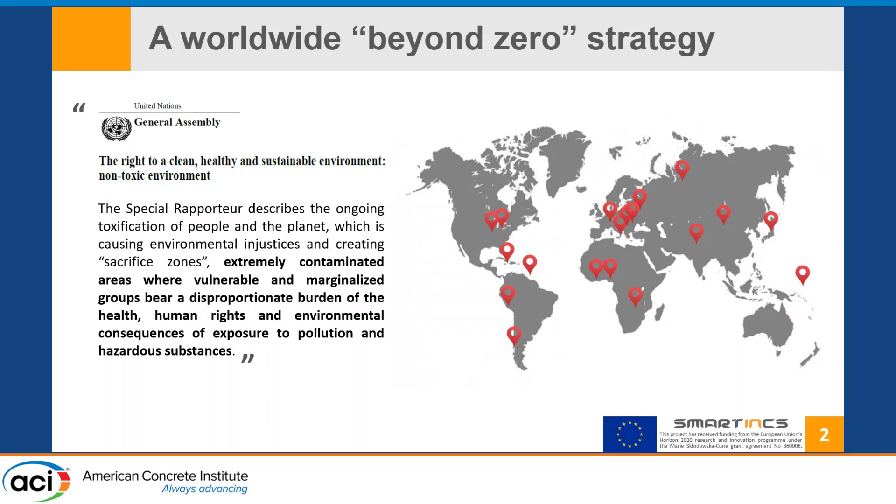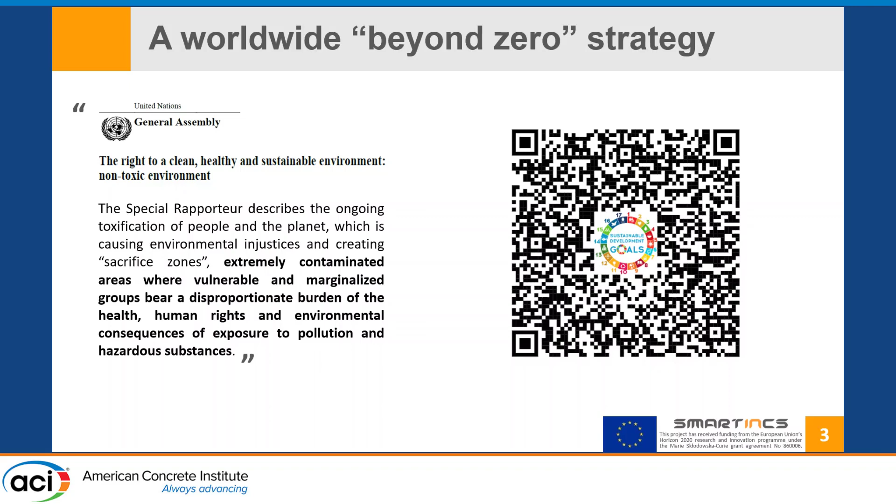What I want to highlight is that this problem has a worldwide dimension. Whenever we talk about sustainability in the construction sector, we are also directly talking about the social responsibility of all of us as part of that sector. So the next step could be to ask ourselves: what can we do during our daily work to improve the sustainability of such a sector?

We can quantify that sustainability in terms of environmental and cost sustainability thanks to methodologies like life cycle assessment analysis and life cycle cost analysis.

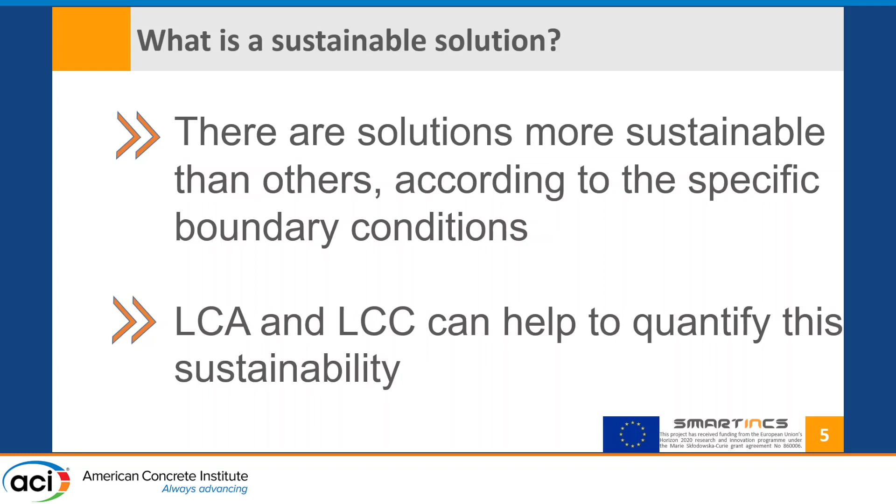We replaced alternatively 50% and 100% of recycled aggregates. Then the specimens, sized 160 millimeters by 40 millimeters by 40 millimeters of height, were then cracked.

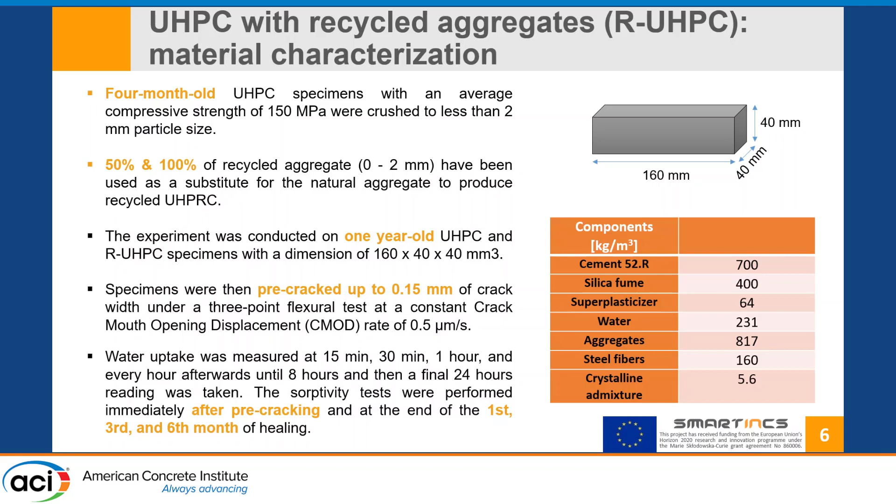We then repeated the sorptivity test to understand what happened over a certain number of months. It's important to highlight the healing environment, because we also added a crystalline admixture to the mix design, not only to reduce the water permeability of the concrete, but also to favor the self-healing characteristics of the matrix.

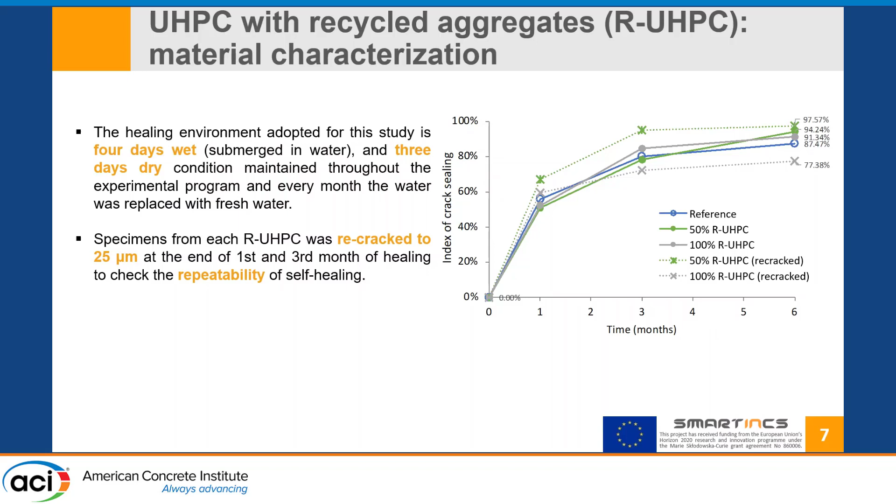The healing environment of this study was 4 days wet, 3 days dry, and we also tried replacing the water almost every month. We also recracked some specimens to check the repeatability of the self-healing properties over time.

What's important to highlight is what we observed in comparison to the reference solution, the UHPC without any recycled aggregates: a reduction in water uptake of up to 50.9%, shown in blue, for the UHPC up to 3 months.

For the UHPC containing recycled aggregates, it was possible to observe a reduction in water uptake up to 6 months. So in this sense, we are not only acting in terms of sustainability by replacing virgin aggregates with recycled aggregates, but by enhancing the self-healing properties of the material, we are also acting in favor of its durability, and thus directly on the sustainability of a specific structure.

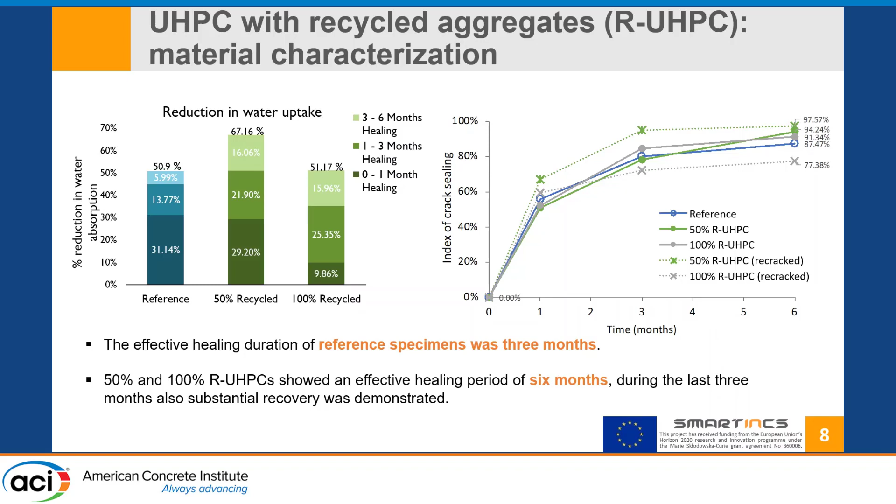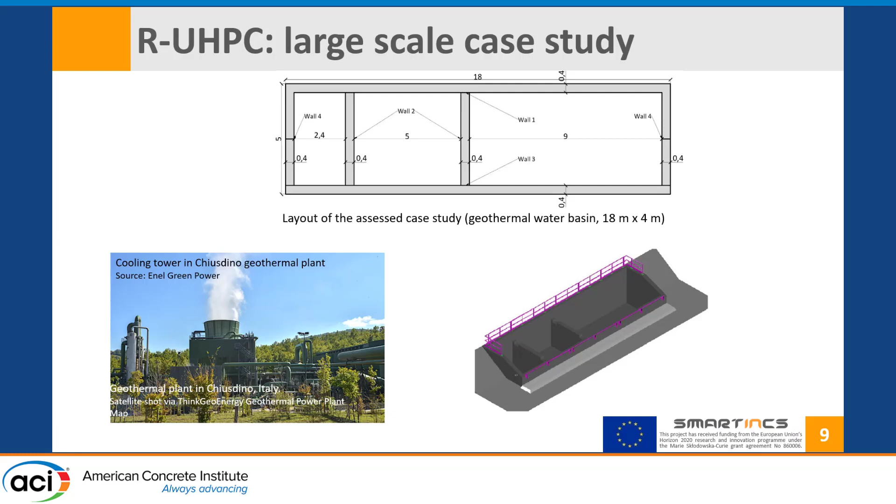What we did was to compare a structure made with ordinary Portland cement concrete to one made with UHPC. As you can see, it was possible to pass from a cross-section of 40 centimeters for the OPC wall to a cross-section as thin as 10 centimeters. Actually, the structural scheme we adopted for the UHPC was made of several slabs supported by columns made of OPC. So I want to highlight that we passed from 40 centimeters to 10 centimeters. But how was this possible?

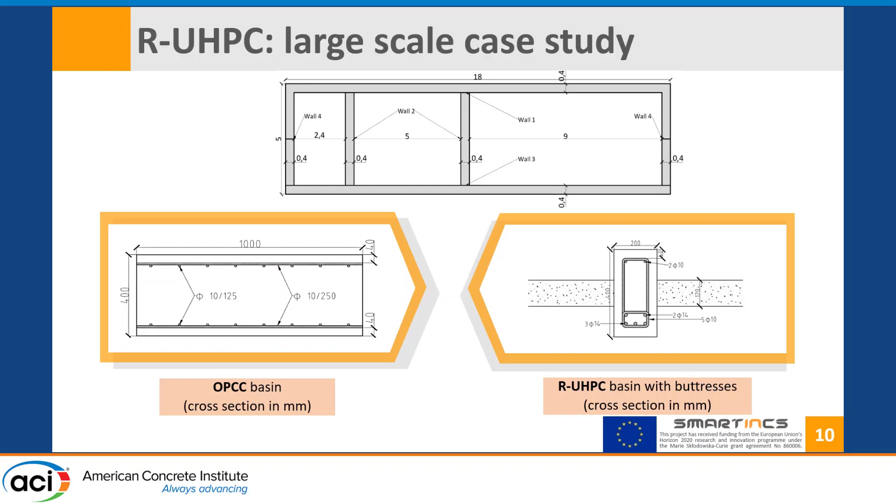This is really interesting, and it's what we want to stress with our daily work, because it's important to talk about durability assessment design. Nowadays, if we only follow the standards, we find some prescriptions, like the minimum water-to-cement ratio and the minimum cement content.

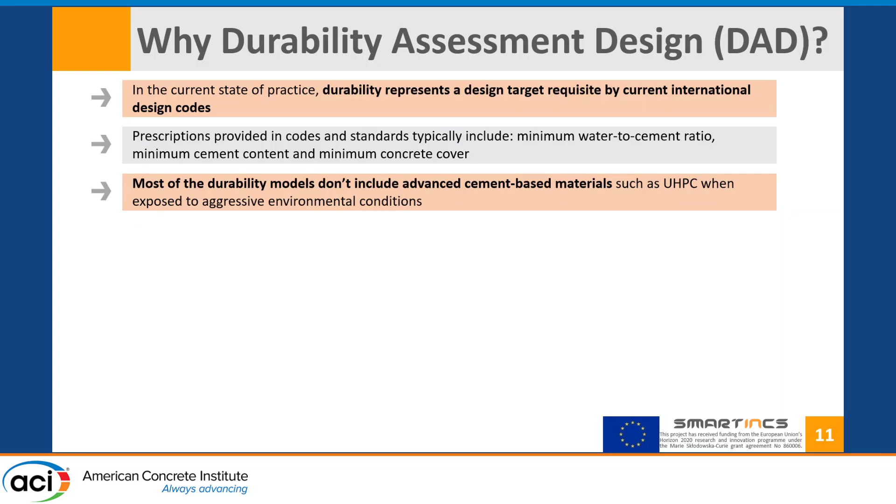If we consider the UHPC, according to the minimum cement content, we had 600 kilograms per cubic meter of cement, so we are already in line with the standards. But maybe we can do something more, because most standards don't really include durability models for such advanced cementitious materials, especially when exposed to a specific aggressive environment like geothermal water, where the main aggressive agent is chloride concentration.

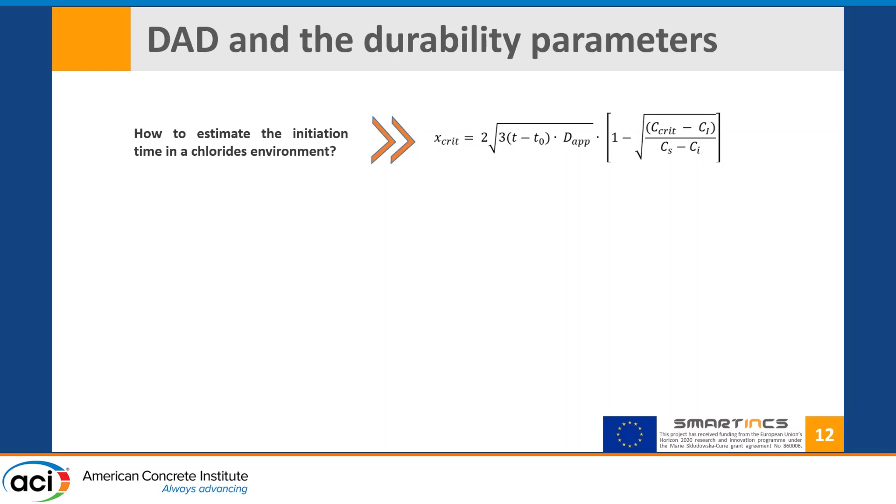To explain the importance of durability parameters, it's useful to present a case referring to the penetration of chlorides into a specific matrix. To make this calculation, we usually employ the second Fick law, which includes the chloride diffusion coefficient, which can have several values. For ordinary Portland cement, we get a value equal to 10 to the minus 10 square meters per second. For UHPC elements, we can consider a value equal to 10 to the minus 13.

Actually, those values, when we make the calculations, can really make the difference. Whenever we calculate the performance of the structure in terms of durability within the service life, we can easily understand the importance of the durability behavior of a material.

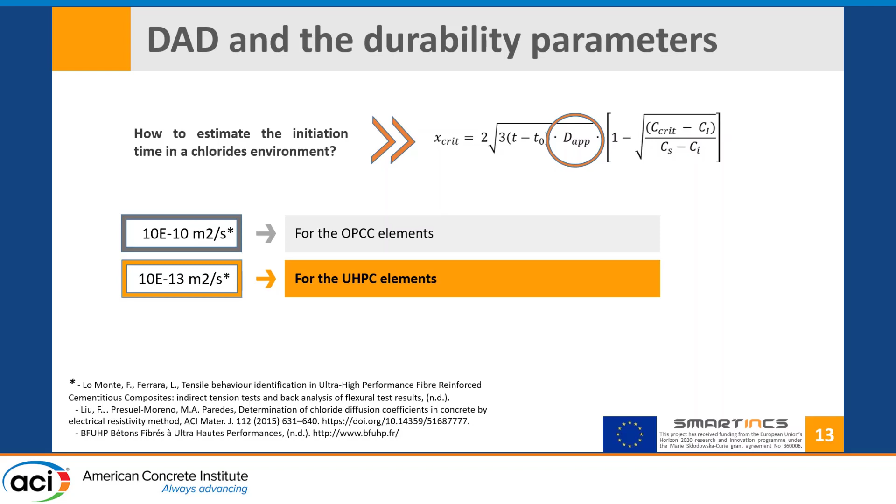To develop the analysis, we supposed that each basin, both the one made with ordinary Portland cement concrete and the one with UHPC, was characterized by 50 years of service life. We also supposed to get the recycled aggregates on site, thanks to a machinery studied in previous works by other colleagues. This is interesting because whenever we assess life cycle impacts, if we also have to include transportation's environmental burdens, the outcomes can change.

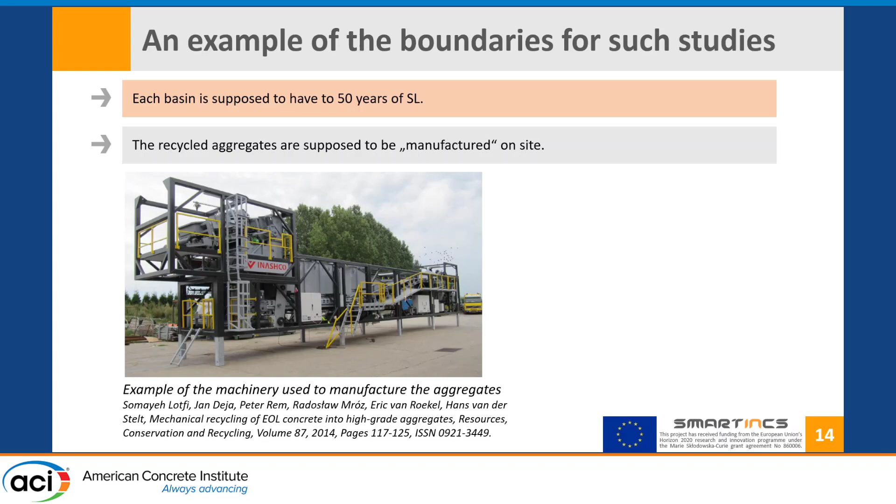But actually, the possibility to crush the aggregates in the same place where they will be employed can enhance the sustainability of the material. That's why we took this scenario into consideration. For the concentration of chlorides, we took into consideration 10 kilograms per cubic meter.

Since we assessed all the environmental burdens, including those referred to the recycling phases and the maintenance activities, it's important to highlight that all steel elements, according to current European standards, are considered as recycled. To predict when it was needed to develop maintenance activities, we didn't give numbers randomly, but took into consideration 20% of corrosion for the steel bars.

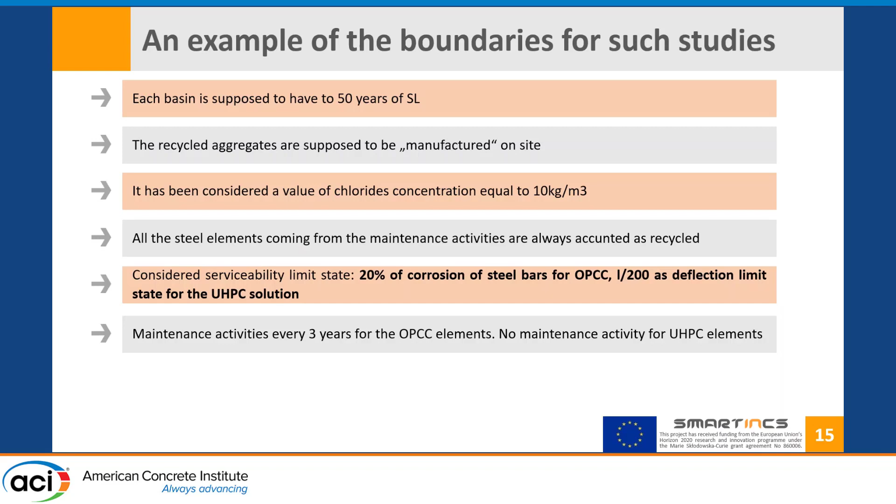For the case of Portland cement concrete, while for UHPC we considered as a serviceability limit state the length loaded divided by 200 as a deflection limit. In the end, we obtained that for ordinary Portland cement concrete, maintenance was needed every 3 years, while for UHPC, we didn't need any maintenance activity within 50 years of service life. This is also thanks to the chloride diffusion coefficient presented before.

So basically, this scheme summarizes what we assessed. For the UHPC matrix, we considered the penetration of chlorides, and of course the constitutive law changed over time according to this penetration. At the bottom of this slide, it's also presented the moment when the bending moment equals the resisting moment. As you can see, this is reached after 62 years in the case of one wall of the structure, and after 68 years in another case.

By the way, it never reached the moment when the acting moment is equal to the resisting moment.

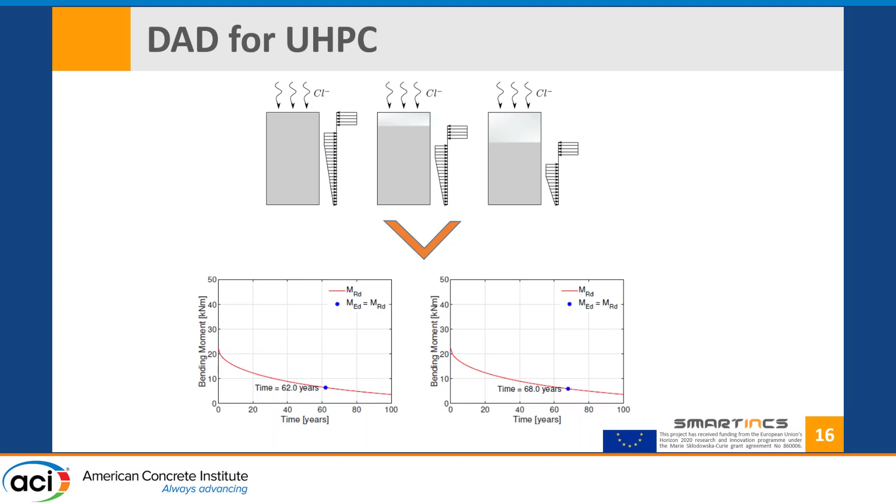I wouldn't define this bad news actually, because at least now, thanks to the sustainability analysis, we understood that there is something we do have to act on to improve the sustainability. And when we went into detail to check why the abiotic depletion was worse in comparison to the ordinary Portland cement concrete, we found that it was because of the presence of silica fume. So for future studies, we know we have to optimize the mix design, and maybe we have to understand how we can replace the content of silica fume.

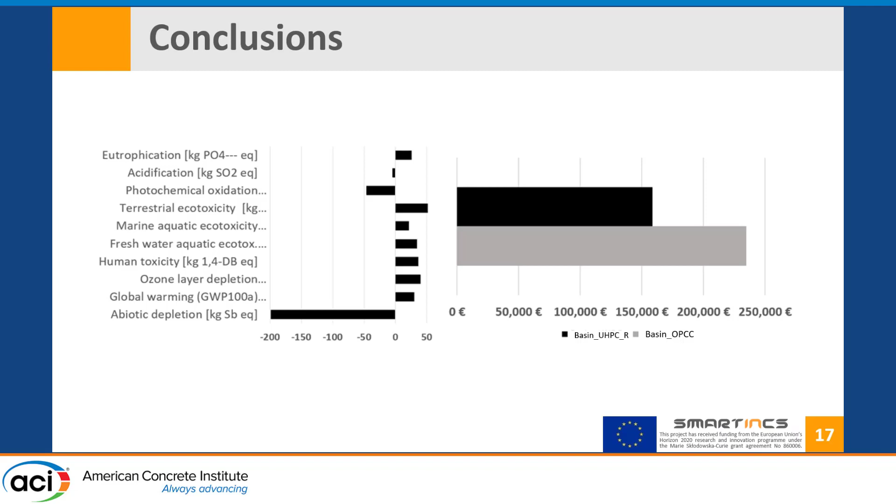So this is just the beginning. We can start to tell customers that within 50 years, which is even better than 100 years in other studies, it's possible to save some money. Of course, what we want to reach at a certain point is to demonstrate that the use of UHPC starting from day one can be more convenient in comparison to the ordinary solutions, even taking into account all the considerations referred to durability.

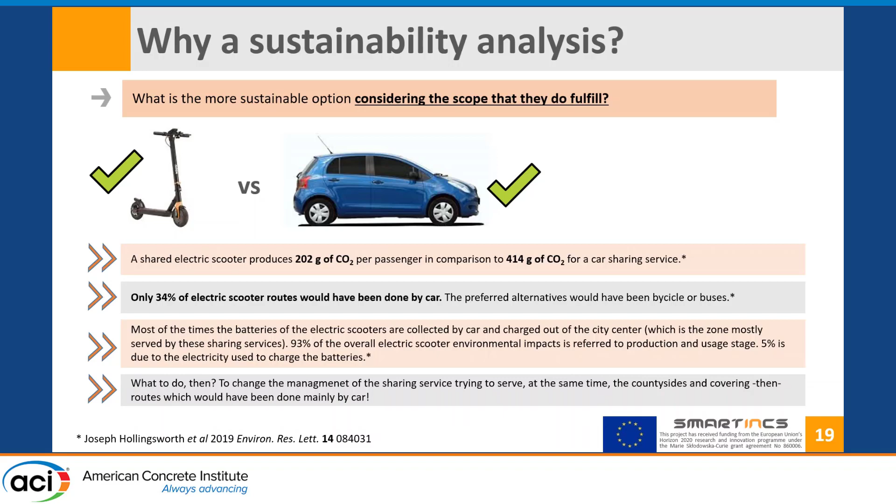And sometimes some studies also underlined that the car sharing service, considering how the electric scooter service is usually shaped, could be more convenient. So this is just to highlight how important it is to develop a sustainability analysis to really check the sustainability of a specific product or material, and how important it is to shape our analysis in a proper way.

And just to conclude, I want to give some shower thoughts. First of all, the key role of durability and of course the self-healing technologies, because by improving self-healing, we can extend durability, reduce maintenance activities, reduce costs, and also reduce the environmental burdens.

Durability assessment design is also used to minimize maintenance activities within a specific service life, which we assess starting from the beginning. The use of recycled UHPC, thanks to the reduced maintenance activities, can allow us to achieve important improvements in comparison to an ordinary solution.

It is important to pass from the lab scale to the large scale case study, because otherwise we will never convince the market that we are proposing something convenient. This happens in my life every day with my students or colleagues from the university. They always ask me why I have to use UHPC if it's not yet very well developed, or if there are standards that already include the use of ordinary Portland cement concrete.

And of course, the importance of life cycle assessment and life cycle cost analysis, which can not only predict the future performance of a specific mix design, but can also provide today a solution for what will be the future needs of the customers that we are going to satisfy today. Thank you for your attention.